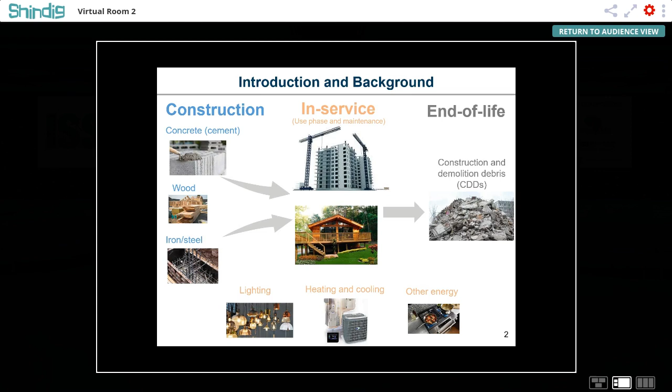And when the buildings are built and in service, there is a lot of energy associated with lighting, heating, cooling, or just human activities in general, which has a lot of carbon emissions. And when the building finishes its service, the end-of-life management, which turns the building into construction and demolition debris, also known as CDDs, also emits a certain amount of CO2 as well. So if we want to look at the potential for environmental improvement in the building industry, we must break down these emissions throughout the different stages.

So currently, a lot of research is working on estimating the CO2 emission potential in the building industry while it's in service. And many of them are actually targeting an international level. So here are some background numbers we pulled from different sources, including journal publications, NGOs, or the United Nations report, and so on. I'll let you look at these representative numbers for a while. But overall, the idea we got from all these sources is that the building industry emits a lot of greenhouse gases and is increasing by a lot.

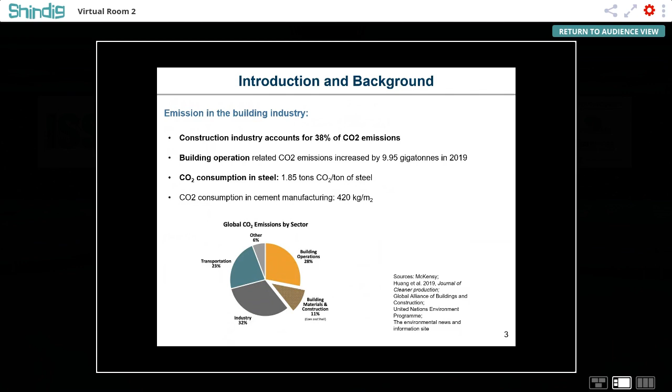However, a lot of the studies are focusing on the international level. So here at the Berkeley Lab, we're looking at the potential of generating a database or report to specifically focus on the CO2 emissions associated with different parts of the building sector, but specifically within the United States. And how do we potentially create a circular economy that could reduce these emissions?

So this is a critically important task because this problem has been looked at by different agencies and institutions, such as the EIA, the US Energy Information Administration. They indicated that in order to reach net zero, direct building CO2 emissions need to fall by 50% by 2030. So as you could probably imagine, this is a pretty ambitious task, and you'll see later that a lot of the numbers focus on the energy use during the building's in-service time, and not many have focused on the construction and so on.

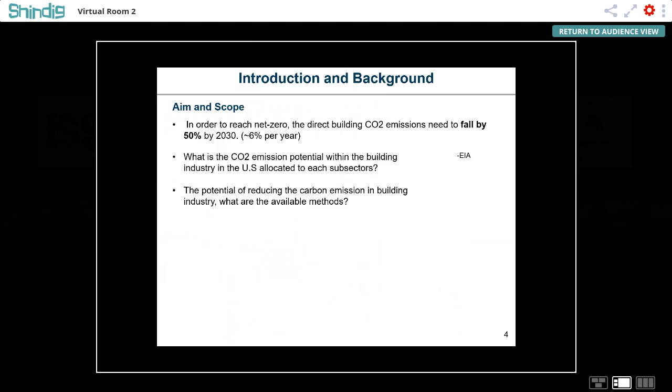And the scope of this study is to see what the CO2 emission potential within the building industry is, allocated to different subsectors. So what is the potential of reducing the carbon emissions in the building industry using economical methods, but also methods that have recently been developed, which include carbon capture utilization.

So right now, we're in the process of building a material IO table, an in and out flow table, for the different materials used in the building sector, including cement, wood, and other stuff. And based on this, we'll allocate the emission related to these different materials, such as, as I mentioned, iron, steel, cement,

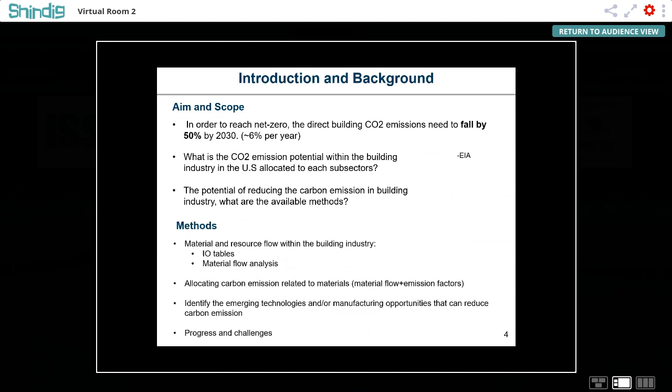and so on. And eventually, we want to get a sense of the temporal behavior of the potential emissions when you have different materials flowing into the building, and you have different numbers of buildings being built every year. So we're looking to essentially couple this material flow analysis into this study in the future as well.

And for this study, we're actually really utilizing data sources from different agencies, as many as possible, to get a good sense of the materials used in the building industry. So these are some examples of data sources we have looked at. For example, the Environmental Protection Agency, the Portland Cement Association, the Iron and Steel Institute, and many others a lot of you might be familiar with.

And while walking through these databases, some challenges we have found so far are that there's limited material flow data within the building sector in the United States. Most of the existing literature is looking at the entire construction industry, which involves buildings, roads, railways, bridges, etc. And we really had to make some assumptions to start with to estimate how much is allocated to the building sector based on several representative data we could find.

So as you can see, we have a lot of challenges. So we definitely had to make a lot of assumptions, which puts us in a difficult position where we try to narrow down the ranges, and we're still doing some of that. So you'll see some of the data I'm presenting has quite a large range of numbers. So that's where this is coming from.

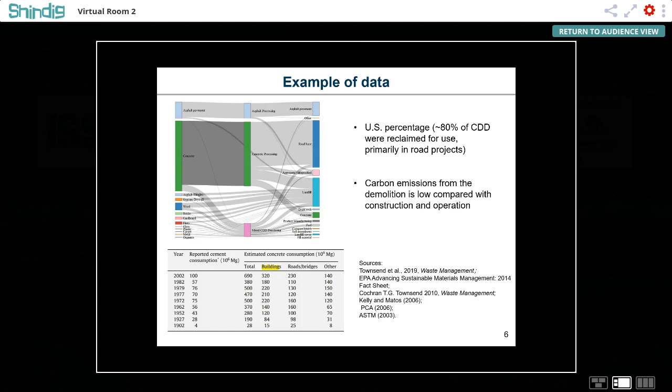So after performing this kind of analysis and assigning carbon emission factors to different materials used during construction and energy consumption for various activities, or some percentage of carbon emission distribution during the different phases of the building's lifetime from literature, our preliminary analysis gives a general idea of how carbon emission is distributed among the building's lifetime.

Within the buildings being built within 1 year, the distribution of carbon emission is mostly during operation, followed by construction. And the carbon emitted during the demolition process is pretty small. And note that, as I just mentioned, this is only the emission of buildings being built within 1 year.

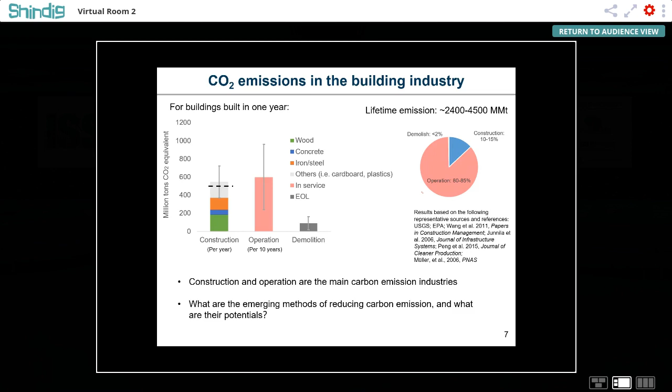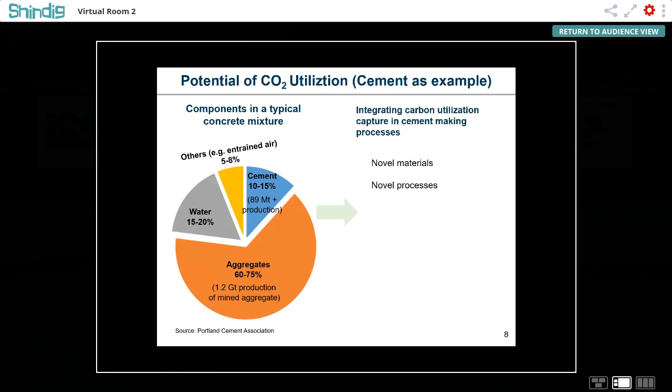So take the cement or concrete as example. This is a typical breakdown of a concrete made of cement. So it includes aggregates, water, cement, and entrained air that is used to cure the cement. So within the cement industry, there are a lot of opportunities to utilize CO2 to change this industry. For example, using CO2 as a curing agent, or using mineral carbonation, which involves the reaction of CO2 with industrial waste like iron and steel slags to make concrete aggregates.

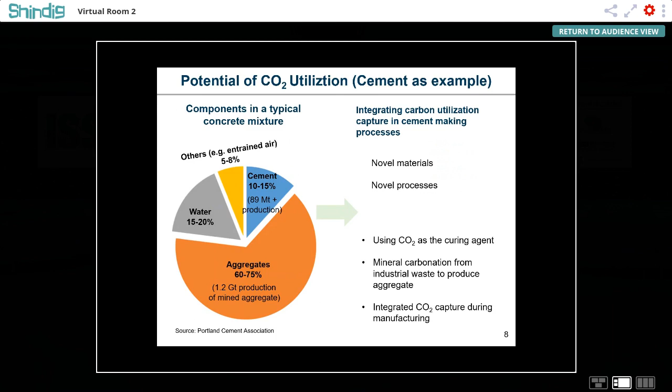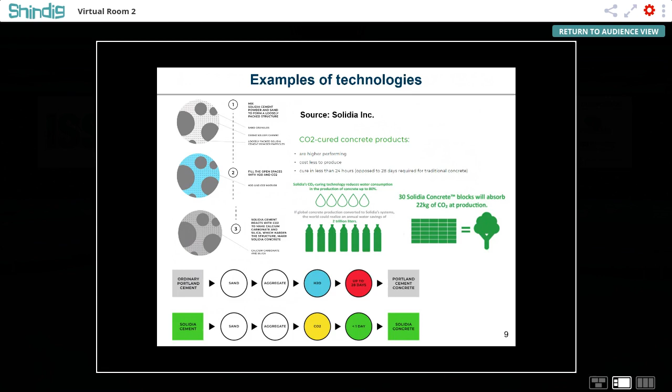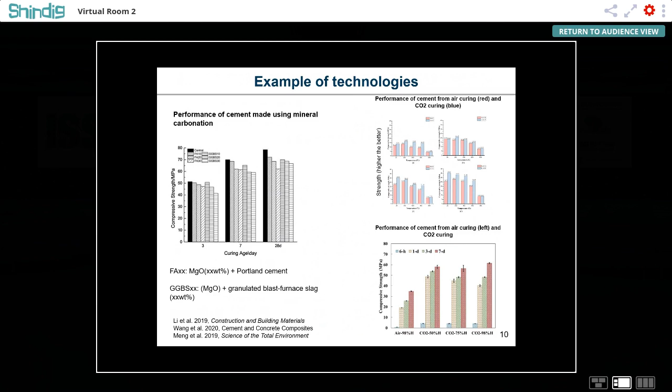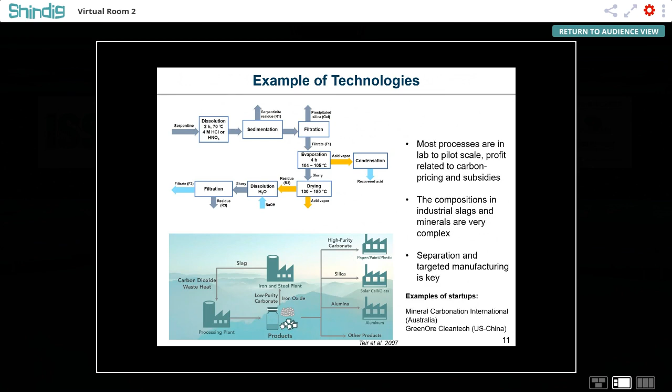So we have done a thorough lit review in the first half of this year related to some of the emerging studies that came out related to these topics. So I'm going to show you some of the example technologies we have looked at. These are some examples, so I can go over them fairly quickly. We have looked at CO2-aided curing, so you probably know about Solidia, which is a company developing novel cement materials from CO2, or magnesium-based cement or concrete made from mineral carbonation and CO2 curing that really exhibits similar mechanical strength as the conventional concrete. And these are some further examples of mineral carbonation, part of which my previous PI or myself has participated in developing.

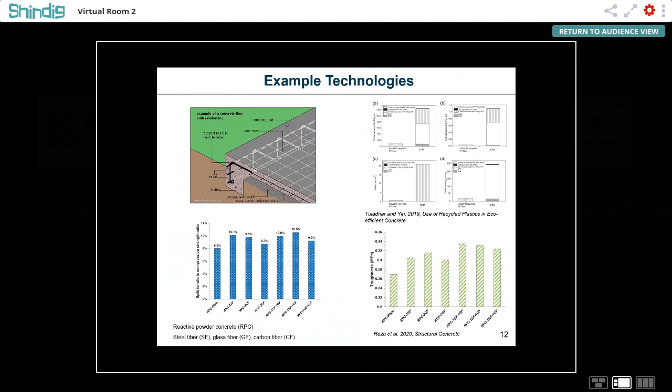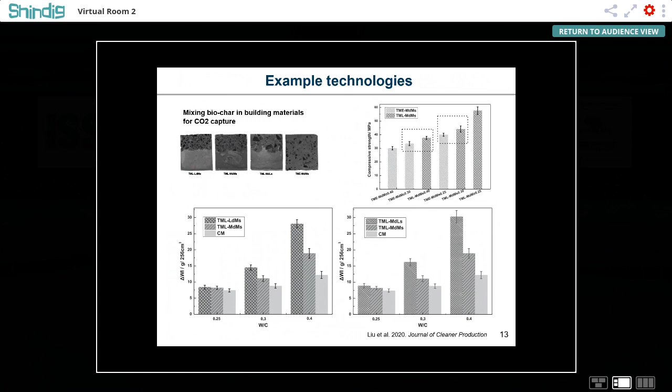And besides cement, we also looked into the potential technologies for steel replacement using glass fiber or carbon fiber, or using materials enhanced with the mixing of biochar, which could be used for CO2 capture during the building's in-service time. And this slide really just illustrates that our scope also examines whether a target process is economically beneficial or economically feasible based on the techno-economic analysis.

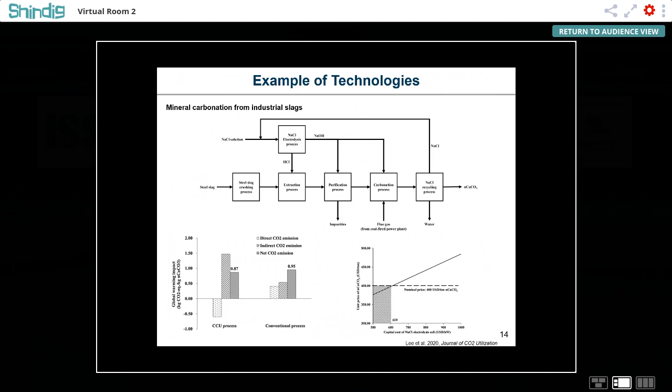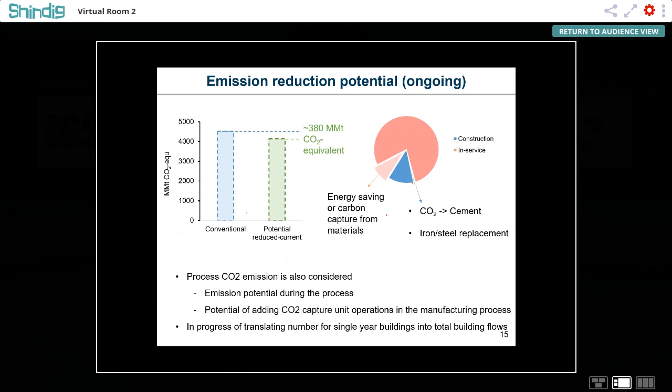But again, because we're looking at only the buildings built in 1 year and their net emission throughout their lifetime, say 60 years, if we incorporate material flow analysis for the dynamic amount of buildings built and in service all the time, the potential net savings could be a lot larger. But we do encounter a lot of challenges, mostly for the material flow, since a lot of the material usage data is not very up to date, and the reporting frequency varies from agency to agency. So it'd be really nice if the United States could have a nationwide reporting system. Once we finish building the material inflow and outflow tables for the building industry, it'll be really helpful for the field.

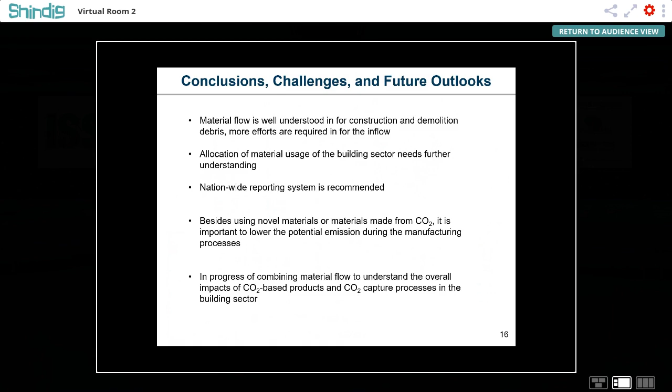So yeah, I think with this, I'm done, and I would like to end by acknowledging the Department of Energy and the Advanced Manufacturing Office for funding this work, and I'm happy to hear your suggestions, for example, databases you find beneficial that I'm missing, or any suggestions on where we're going with this. That will be really helpful for me. Thank you, and I think I'm finished.

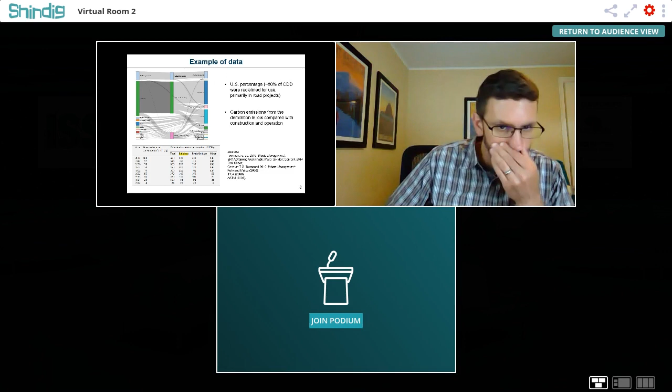Yes. So it's something we found through literature review: for construction and demolition in the United States, EPA was doing a pretty good job. They characterized it pretty well in terms of how much construction and demolition debris is going into the next use of the materials. So by building a circular economy, we want to quantify how much of the material inflow to the building sector is from construction and demolition debris.

And other people have found that the carbon emission related to handling or just the demolition process is really small compared with the actual construction process. So that's why we believe there's a great opportunity for circular economy within the building sector, and that was primarily the reason why I put that in my title.

Great, good. Fernanda, do you want to ask a question? Yeah, please go ahead. Yes, I do. I don't know if you covered that, and thank you for your presentation. But my Wi-Fi dropped at the beginning, so I'm not sure if you covered that.

But did you consider the emissions related to the material replacements and the material flows related to the replacements of these building materials over a building life cycle? I think I mentioned this on this slide. Right now these numbers are conservative because we haven't taken into account the replacement so far. Great, and there's a question in the chat from Bensu wondering if there is much of a study about carbon emissions due to repair and replacement.

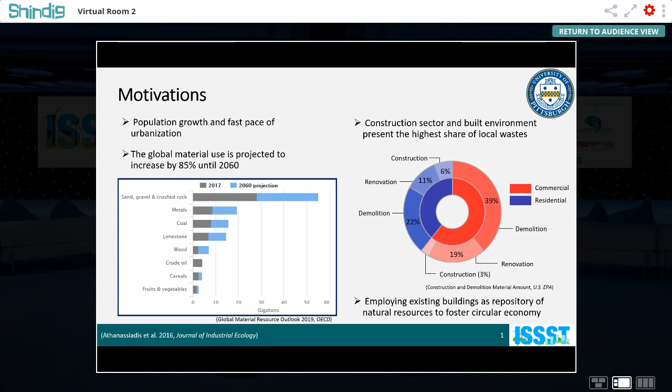So with that being said, the materials that are accumulated in existing buildings can be used as a repository or mines for natural resources, and then can be used for new construction, which promotes and improves the circular economy of building sector. So in this project, our goal is to advance the building sector in the context of circular economy through reviewing the existing literature on material stock analysis of buildings.

So in order to achieve this goal, the first objective was to understand and characterize the scope, system boundary, and resolution of different articles. Further, we will classify the existing methods and approaches. And finally, I will talk about the barriers or roadblocks that we found regarding the MSA of buildings and opportunities for future work.

So we utilized a Scopus database to find relevant articles which were published after the year 2000. So 3 phrases were used as keywords to search the database. And under the criteria of time and these keywords, we found more than 11,000 articles. So through a rigorous process of reviewing the abstract of those articles, we narrowed down our selection into 62 articles, which focus on the material stock analysis of buildings at a scale.

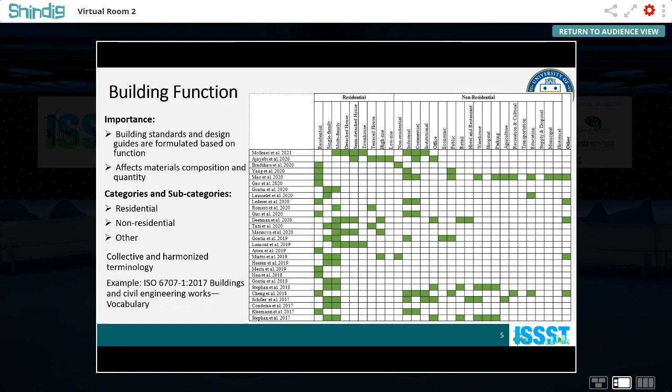So in this table, you can see the partial list of articles that we reviewed and their categories of building function. So in either of these 2 broad categories, residential and non-residential, we identified some subcategories. 9 subcategories were residential buildings and 19 subcategories under non-residential. However, if you look at the subcategories of non-residential buildings, you can see that there are some overlaps. For example, buildings categorized as economics can also be categorized as institutional buildings or office buildings, but different articles used different terminologies in this regard.

So the recommendation here is to use collective or harmonized terminology for building function, which can actually improve the reproducibility of this field. For example, using ISO standards on buildings and civil engineering works vocabulary.

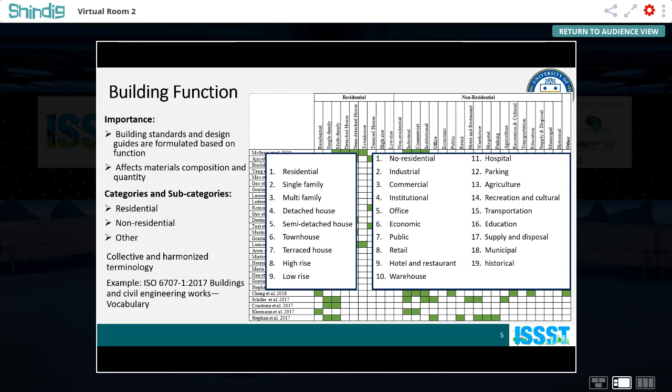The second aspect of characterizing material stock analysis of buildings is building components. So we all know that building materials are found either in structural components or non-structural components. But the importance is in the end of life of the building components. Selecting end-of-life strategies, which usually align with circular economy, can be different for structural components or non-structural components.

For example, wood that is retrieved from structural components has a different obsolescence pathway than wood that is actually retrieved from window frames. However, when we were reviewing the 62 articles, 80% of them did not distinguish the material from structural components and non-structural components. And only 19% of these articles conducted MSA for structural components.

So in future, it is important to not only quantify the material, but also specify where these materials are located in the building, which actually improves the circular economy and facilitates the after-life use of building materials or components.

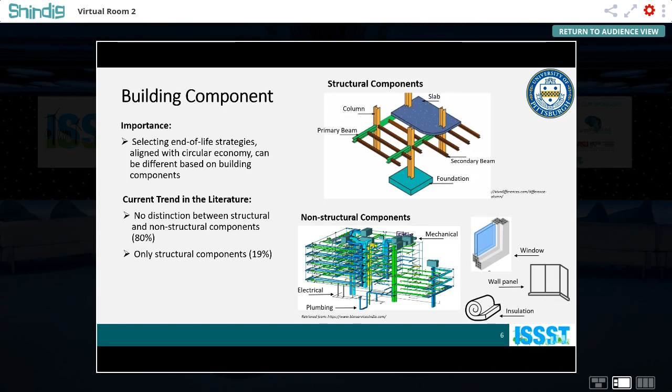But these were not the only thing that we were interested in regarding the spatial or geographic boundaries. We were also interested in seeing where these material stock analysis studies conducted their research, because the location of materials is also important to facilitate the reuse or recovery of materials and using them in new construction.

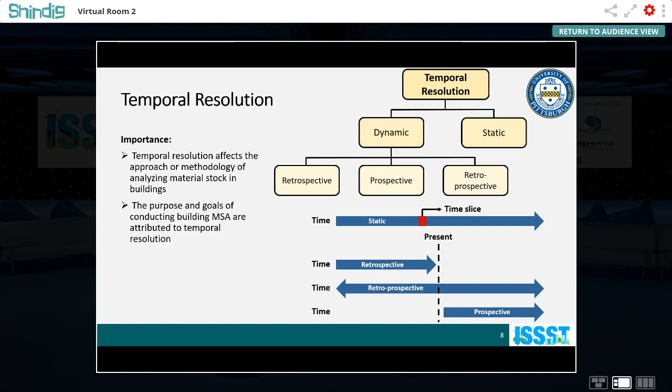Finally, there are dynamic prospective studies that are interested in projecting how the balance of material, in the context of their quantity and type and also spatial distribution, will change in future, which is important for most planning and policy making purposes. So with that being said, I want to transition into the methodology or the approaches that are usually used for the material stock analysis of buildings.

The core component of MSA is defining typologies, which are groups of buildings that have similar characteristics regarding type and quantity of material. And they are important because we cannot quantify the material of thousands of buildings in an area. We need to have archetypes or typologies that represent the building stock in an area. The importance of detailed classification and characterization of building typologies is that they improve the accuracy of models, and also help the transferability of studies for future purposes.

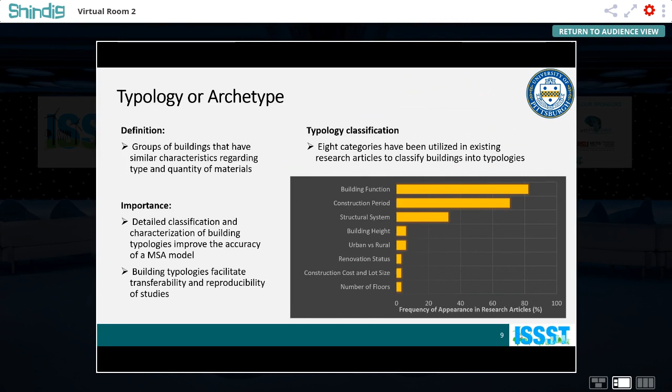So reviewing the articles shows that 8 categories were mostly used to classify buildings of an area into typologies, which are listed in this frequency diagram here. As you can see, building function followed by construction period and structural systems are the most popular ones. Building typologies are important because material intensity of buildings is determined for every typology, and then that is scaled up to an urban area or a country.

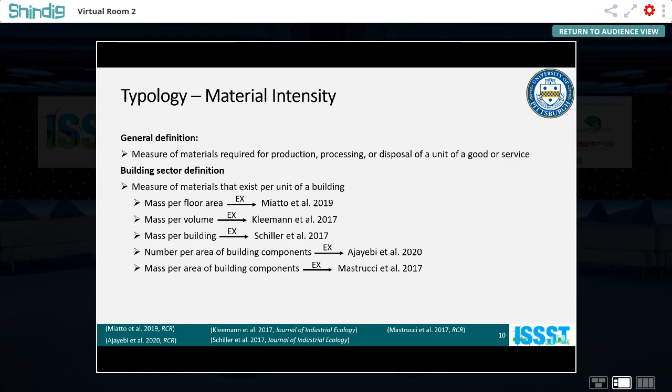So the material intensity can be defined as the measure of material that exists per unit of a building. For example, mass per floor area, mass per volume, mass per building. So our intention was to create a comprehensive inventory that documents the categories that were utilized to define the typologies, and then the number of typologies for every study, and how material intensity of those typologies were determined, and also the unit of material study.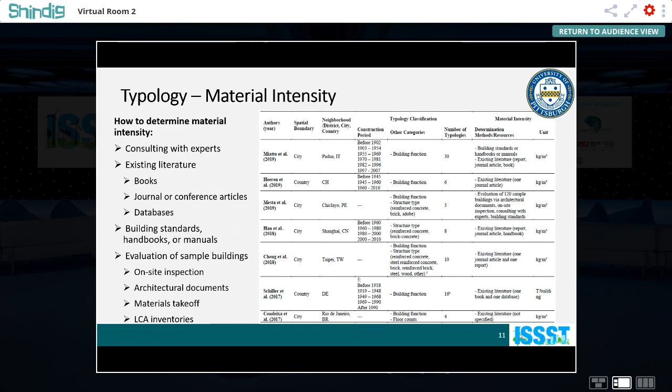The third bottom-up approach estimates the volume of buildings using GIS analysis and meshes the volume with the material intensity to quantify material. Finally, the element-based bottom-up approaches use surface area or volume of different elements of buildings with their corresponding material intensity in order to quantify the material. I have to say that bottom-up approaches are really beneficial for circular economy purposes because it provides the opportunity for authors to spatialize the materials in an area.

Top-down approaches are either using import, export, and domestic production data to quantify the material, or using population and floor area per capita meshed with material intensity to quantify the material. Finally, there are few studies that use remote sensing techniques such as night light images or satellite images to quantify the material stock of buildings. And I have to say that top-down approaches usually provide the big picture of the material accumulated in the buildings, which is usually beneficial for policymaking purposes.

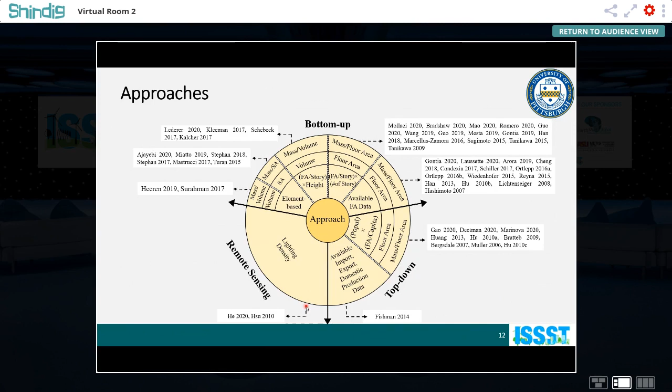So with that being said, we found that lack of databases, especially in regards to geometric properties of buildings, is the first barrier of material stock analysis of the building sector. The second barrier is paucity of building typologies and their corresponding material intensity, which is the big portion of conducting material stock analysis. As I mentioned before, one of the barriers is disparate terminology regarding building function, and also not distinguishing between the materials accumulated in different components, such as structural components and non-structural components.

So one of the opportunities that can be pointed out here is utilizing the existing articles on MSA of buildings to move forward with component-based component stock analysis. Rather than quantifying the materials, we can quantify the components which can be reused directly in new construction. Also, we can use the available geometric data from existing urban building energy models to foster and promote the material stock analysis of buildings. For example, there are urban building energy models in the United States, in Boston, Pittsburgh, Houston, San Francisco, and Los Angeles, that can be used for material stock analysis purposes in the future.

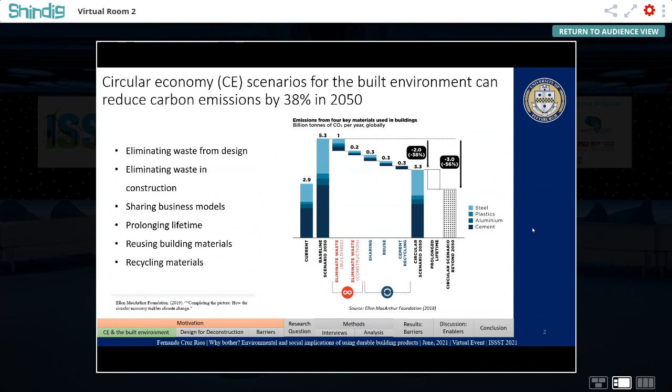Sharing business models like peer-to-peer renting, office sharing, and multi-purpose buildings to increase their utilization rates and better use the building space. Also prolonging lifetimes, so maintaining the economic value of a building over time through modular, flexible, and durable design. And finally, reusing building materials and recycling them when they cannot be reused anymore. So in theory, all of these scenarios can be partially enabled by design for disassembly, or design for deconstruction, as it's often called in the built environment.

So the deconstruction of buildings as opposed to demolition is not uncommon, especially for historical buildings that have valuable materials like reclaimed wood. But one of the main challenges of deconstruction today is that the buildings were not designed to be taken apart. So design for deconstruction is the act of designing a building to make it easier to take it apart in the future.

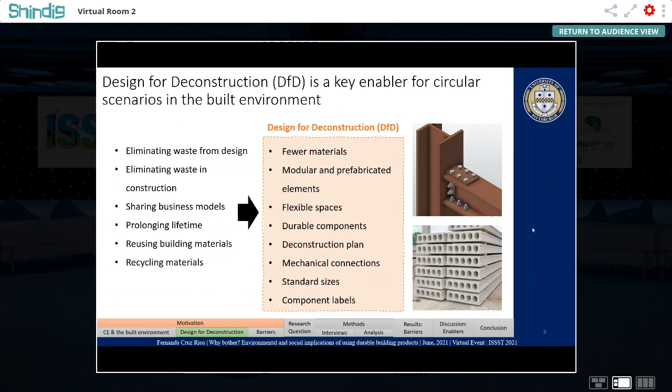And this future can be either a short-term future, like a partial deconstruction for building renovations, or long-term, like a complete deconstruction instead of the demolition.

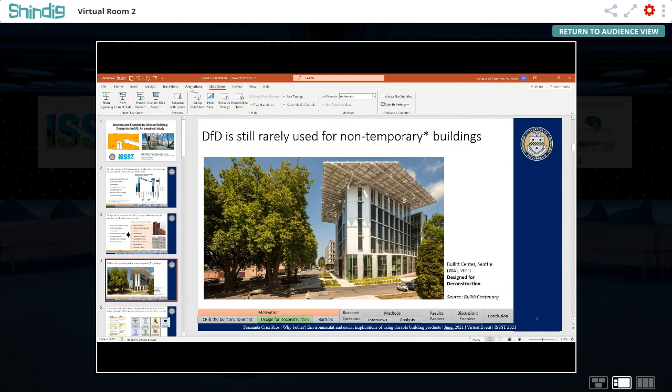1 second, I think I have an automatic, I don't even remember how to, anyway, I don't remember how to do that if anyone does. But it's just shifting automatic. Can I leave my screen like this? Is it okay? I'll just assume it is and keep going. Let me go back here.

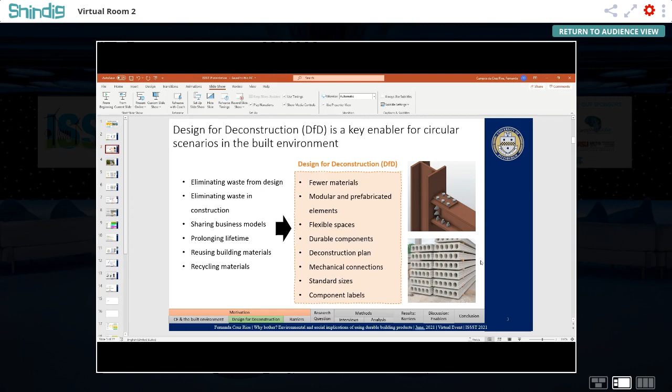Sorry. So some key principles of design for deconstruction are using fewer materials, using modular and prefabricated elements with standard dimensions, designing flexible spaces that can be adaptable to future building demands, providing a deconstruction plan, and also labeling the building components, and designing with durable components that are mechanically connected. So for example, using screws instead of welding or adhesives.

And there are very few examples in the world of non-temporary buildings that have been designed for deconstruction. And when I say non-temporary, I mean buildings that are designed to last anywhere from a few decades to a few hundred years in their site. So that does not include buildings that were designed for specific events, like expos, for example, and buildings that are designed to be taken apart or relocated in the very short future.

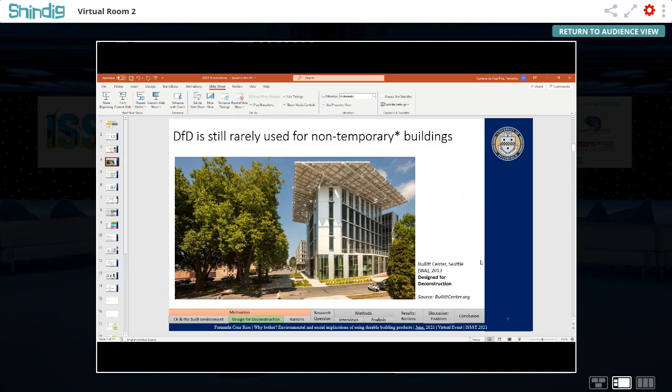And one example in the United States is the Bullitt Center in Seattle. It was designed for deconstruction. So for this building, one of the key drivers for this kind of design for deconstruction was that the building could last longer by adapting to future demands. So for example, if the facade needs to be changed in the future for any reason, it all comes apart from the core structure. So we don't need to demolish the whole building.

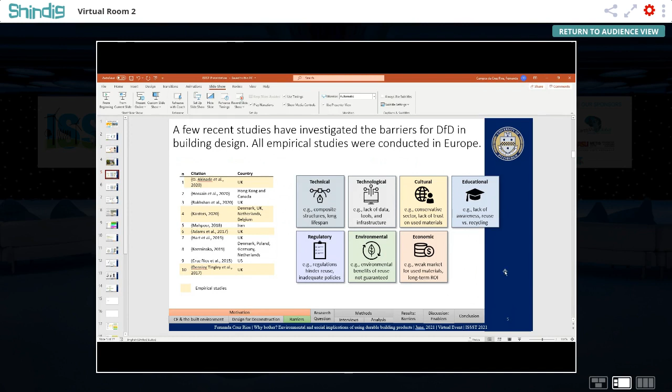Educational barriers are related to stakeholder awareness, knowledge, and skills. Environmental barriers include environmental impact metrics and reduction strategies. Regulatory barriers include regulations, code standards, and contractual issues. And finally, economic barriers are related to issues of markets and costs.

So from the barriers found in the literature, it was clear that strategies like design for deconstruction would not grow in the construction sector unless the body of knowledge available becomes less fragmented and actually able to guide construction stakeholders on taking these progressive steps towards circular economy. And that is especially true for countries like the US, because we lack here circular economy specific legislation and educational campaigns. And the progress toward circular economy here depends on bottom-up efforts from construction stakeholders.

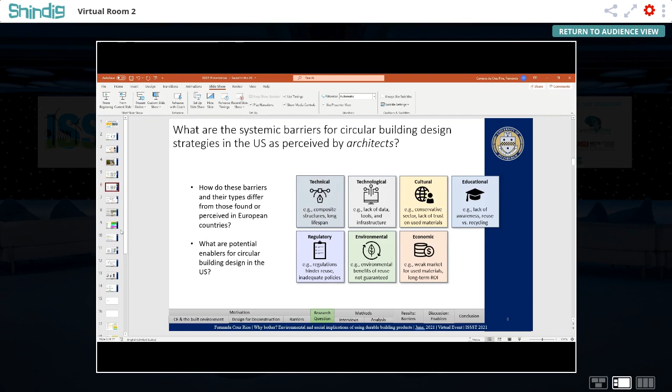And yet we did not find any studies that were investigating the barriers and enablers as perceived by these US stakeholders. So in our study, we asked, what are the systemic barriers for circular building design in the US as perceived by architects? And how do these barriers and their types or categories differ from those found in the European countries? And what are potential enablers for these barriers as well?

So to answer these questions, we interviewed 13 architects randomly selected from the design firms with the largest revenue in the US. They had an average of 26 years of experience, and we did not require any previous experience with circular building design. We asked them about the design process, what were the client's drivers for sustainable design, also about specific design strategies like using demountable joints, using salvaged building components, using modular and prefabricated building components as well. And at the end, we asked them about their perception about design for deconstruction.

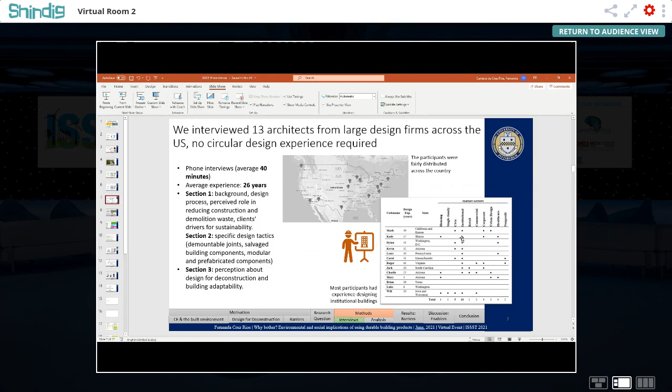So these interviews were conducted by phone. They lasted an average of 40 minutes. As you can see in this map, they were fairly distributed across the country. And most of them had experience designing buildings for the institutional sector, as you can see in this table, although they did design for several other sectors as well.

So after we conducted these interviews, we identified and categorized the barriers existing in the literature according to their type, like I've mentioned before. So then we did a thematic analysis in our transcripts to identify the similarities and the differences with the literature. So from this analysis, we identified new barriers to the literature, the most mentioned barriers, as well as a few potential enablers that emerged from our data, and the number of barriers per type that we then compared to the empirical studies in the European countries.

Then we propose more potential enablers for each barrier based on our experience. And here I need to mention that the co-authors and I have been involved in important circular economy discussions recently. Dr. Bilec and I are working together in an NSF grant called Convergence Around the Circular Economy. And we have discussed these barriers and enablers in different sectors with scholars from different disciplines, from anthropologists to chemists, and also with industry stakeholders. And we also organized a workshop called Designing for Circular Economy, from Molecules to the Built Environment, where we discussed several barriers and enablers with circular economy experts around the world.

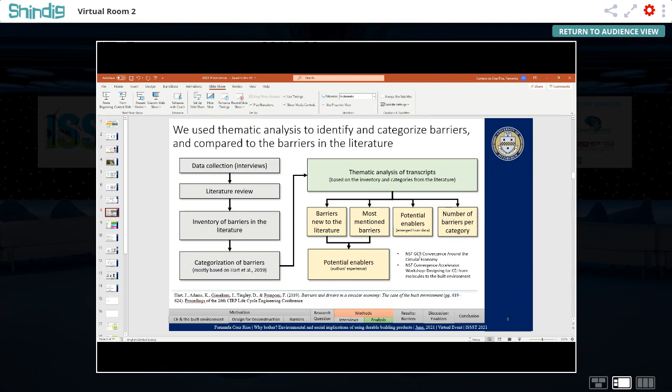So here's an example of our process and findings for one of these types of barriers, which is technical barriers. So here in this table, articles 1 to 10 are the articles that were mentioned in the table that I've shown before. And number 11 is this study, our interviews. So here we can see from our barrier inventory which ones we also found in our data, and then the barriers that were new to the literature at the bottom here.

So for example, one participant mentioned that there were conflicting goals between pre-engineered structures and future reuse. So for example, when you optimize the design of a structural component to a certain load, you use fewer materials, so you're doing a resource efficient strategy, but you make it harder to reuse that in the future. And another participant mentioned what he called a Walmart effect here in the US, which he described as a continuous drive to make things as inexpensive and non-durable as possible.

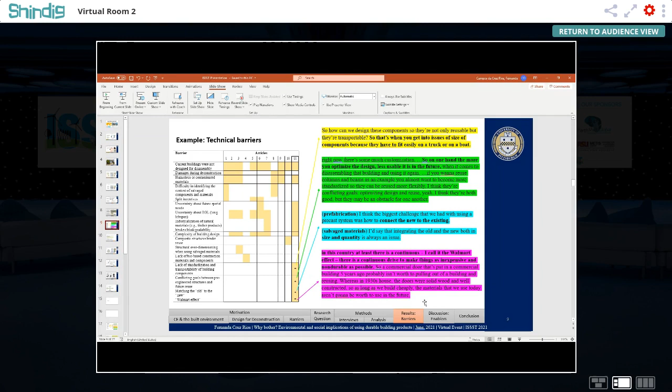In total, we identified 10 barriers that were new to the literature. And of course, we don't have time to go through all of them, but I've highlighted here an interesting example. There was a cultural barrier that was both new to the literature and one of the most mentioned by the participants. And it's the belief that design for deconstruction compromises building durability and resilience. So in other words, the architects think that buildings that are supposed to last for more than 100 years, like institutional buildings, for example, need to have strong and resilient structures, and that does not lend itself to deconstruction. So they perceive resilience as strength and toughness as opposed to flexibility and adaptability.

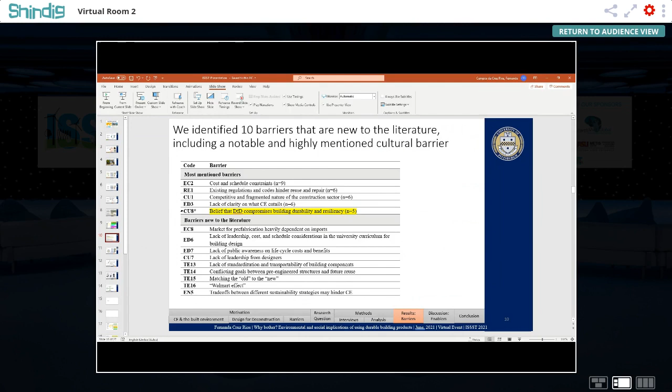In comparing the types of barriers with the European studies, we found that here we had a larger share of educational, cultural, economic, and technical barriers, and a smaller share of regulatory and technological barriers. So there can be a few different explanations for these differences. For example, the participant samples varied across the studies. So in our study we only interviewed architects, while a couple of other studies used a similar sample size, but they used a mix of different stakeholders. And the data collection methods also varied from surveys to focus groups to interviews.

But another possible explanation for these differences is that we have a different regulatory, economic, cultural, and educational context here compared to European countries. So for example, in Europe, we have the Circular Economy Action Plan. We have the Ellen MacArthur Foundation and European green building rating systems that have contributed to raise awareness and knowledge around circular economy for the past few years.

And finally, some barriers that are found in Europe may be enablers in the United States and vice versa. So for example, storing salvaged materials in European countries is often cost prohibitive because they don't have enough land to store it. But here we have a larger availability of land in the US, which means that we have more opportunities for accommodating the storage infrastructure, which is likely to result in more economic storage solutions for salvaged materials.

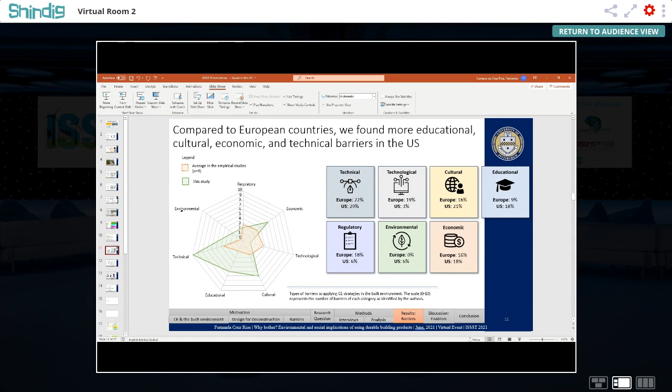And we also identified several enablers that could help overcome a range of barriers, and the stakeholders that would be responsible for creating each enabler. So for example, NGOs, professional associations, and universities could help raise awareness on circular economy. Building designers could try to sell design for deconstruction as a means to increase buildings' adaptability and resilience, so educating building owners on that.

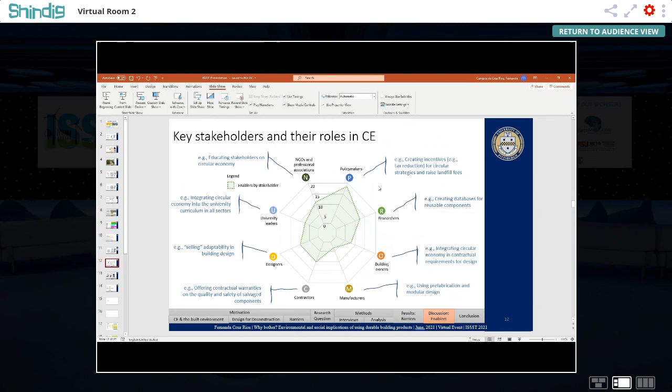So if you're interested to see the whole picture, we do have an article in press in the Journal of Construction Engineering and Management, where you can find a more detailed list of all the enablers, which barriers they address, and the respective stakeholders that would help put them in place.

And in conclusion, to make circular economy possible in the built environment, we need both top-down and bottom-up enablers. And to blend these top-down and bottom-up enablers, we need to create opportunities to have a variety of stakeholders at the table early on. And this is true for both industry and academia. So for example, in industry, we can encourage project delivery methods where you can have consultants from several disciplines on board from early design stages.

And in academia, we need more convergence research to create enablers to the several different types of barriers that we mentioned. So that means that we must understand that designers and engineers cannot do it alone. And there are important cultural and economic barriers to overcome. So we need to include disciplines like political science, economics, and behavioral sciences in the discussion.

And finally, we need to understand that the circular built environment is a complex system. And these barriers and enablers, they are interconnected. And we have to understand these connections and what are the systemic, economic, environmental, and societal consequences for buildings and cities. Thank you. That's what I had.

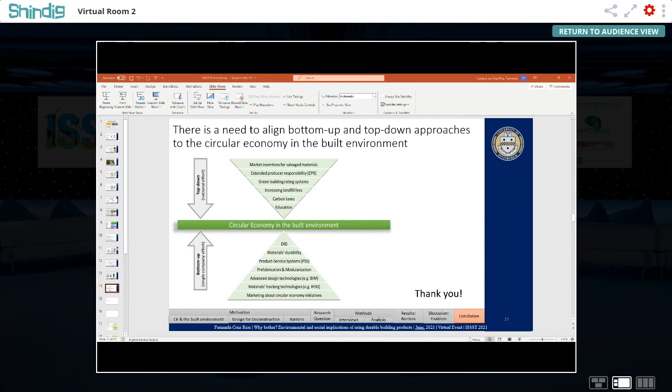And I don't know how to stop sharing now. Oh, I see it.

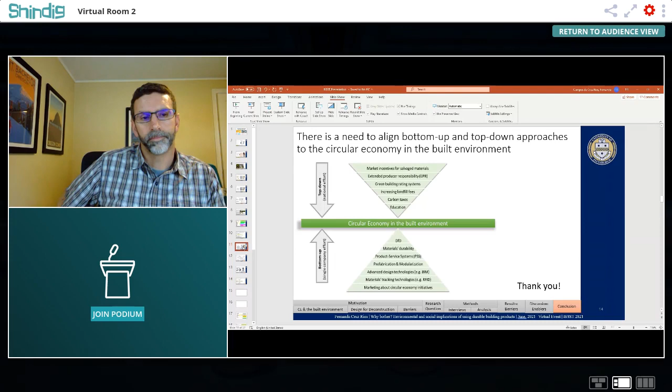We have in this slide here several. So this slide is only about these enablers that we proposed, and some of these enablers emerged from our data, from the interviews, but others we came up with according to our experience in circular economy as well. So some of them that I did not mention include, for example, university leaders. They can integrate circular economy into the university curriculum in all sectors, so that can facilitate multidisciplinary discussions.

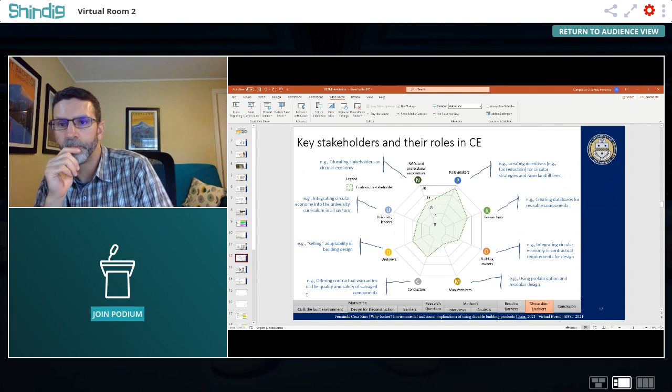Contractors could offer contractual warranties on the quality and safety of salvaged components, and that's key because there's a huge lack of trust when architects try to procure salvaged materials. It's more like treasure hunting for them. So there's a bunch of other enablers. I could talk about this all day. I hope I gave some examples. Yeah. Great.

All right. Looks like we got... Oh, Federica, did you want to ask a question? Unfortunately, we're having trouble hearing you. You want to try again? Yeah, it doesn't seem to be working. Normally I would be delighted to have you talk, but let's try it one more time. Now we can see you. That's good, but it's still pretty quiet. Maybe now. Okay, yeah, there we go. Okay, I had to change the microphone. Sorry for the trouble. That's all right. I'd rather hear it from you than have you type it. So please go ahead.

So thank you for the presentation, Fernanda. I had just a question: if we start to actually employ this method and design for disassembly, what's the extent of the research until today about re-employment of structural materials? Because maybe for finishings, it's something that we have the knowledge to start doing right now, but for structural materials, what can we actually do? That is a great question, Federica.

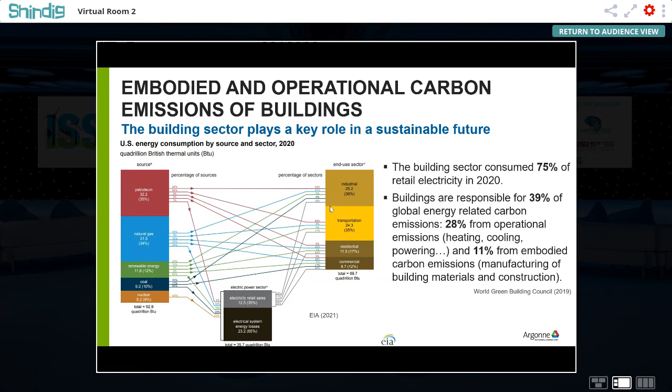And that is why we have an ongoing effort from our center to expand our Greenhouse gases, Regulated Emissions, and Energy use in Technologies, or GREET, model to develop a new building LCA module.

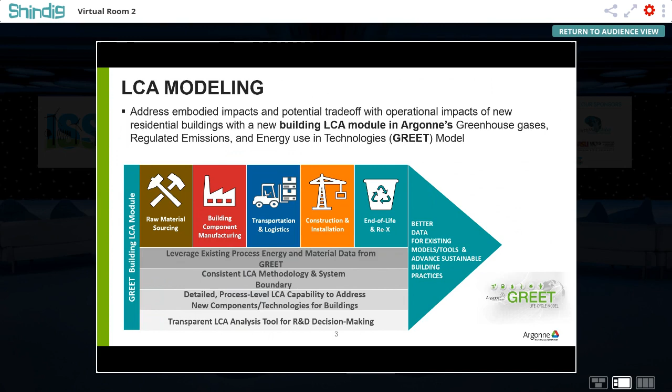The module leveraged the existing process-level data from GREET built in the past decades and has the ability to analyze building components and whole buildings. And here's a screenshot of the user-friendly page of our GREET building LCA module. This module is to be released hopefully in the fall. For this study specifically, we used this beta version to do the LCA modeling.

The inventory data for embodied carbon emissions is collected from multiple data sources such as GREET, research papers, industry reports, or EPDs. And the operational data is collected from 3 houses of similar sizes in the same area. Because of the importance of understanding building energy and emissions, we utilized the GREET module to do this analysis. The study home is a 2-story single-family home in the greater Chicago area, built last year, so it's super new. We would like to discuss key drivers and potential trade-offs between the embodied and operational emissions.

So now a little bit closer look at the house. From the view of materials, we can see that concrete is the dominant material used in terms of volume, followed by multiple insulation materials such as cellulose, spray foam, and EPS. For the sake of time, we will not show the details of data sources or modeling methodology. So let's jump to some preliminary results directly.